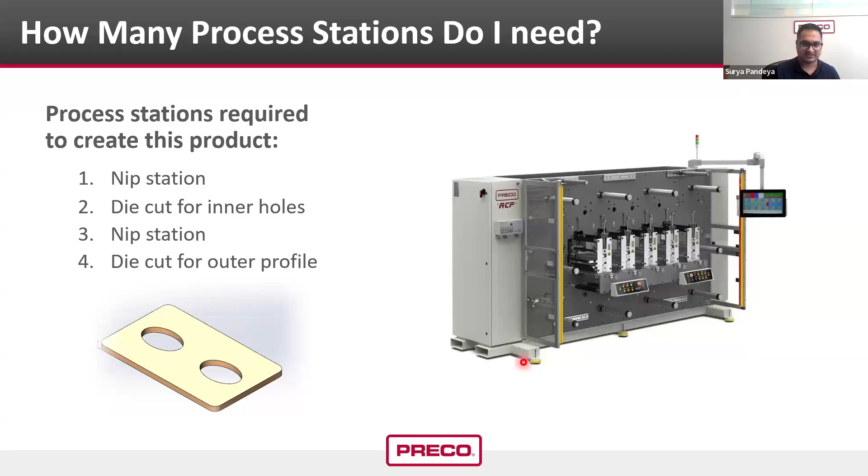So we'll be going through what kind of stations do we need, and all of the other factors that will play into it. So let's start with some examples.

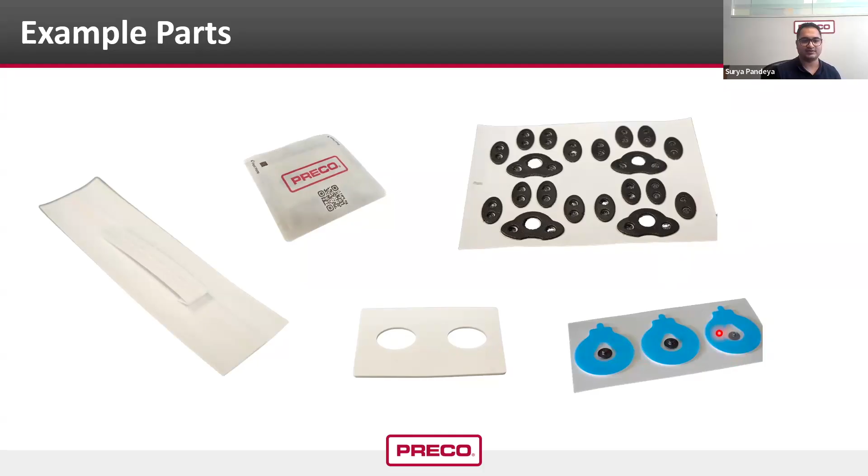And this part is like, because it is a high bond adhesive, like a VHB sample, you might need a laser cut because the VHB will stick to the die. So laser cutting all of these features, and then die cutting the whole part afterwards. And this is a simple part that we talked about previously. And here is another one that requires assembly into the product, so all of these little dots that can be assembled. So these are all the things that you can do on a rotary with various kinds of applications.

So what requires a dedicated station? Here are some of the processes that require dedicated stations for them.

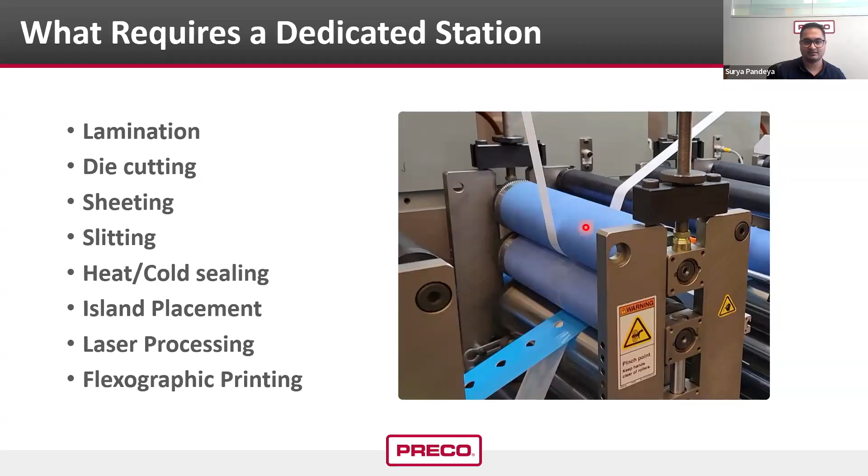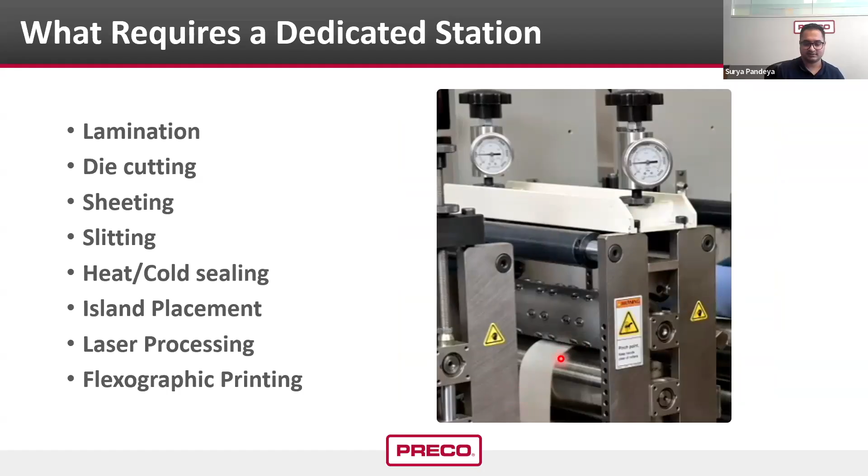The processes are like lamination. Here, the lamination is happening with all of those webs going into the nip station. And then here is another one, die cutting, where all of the features are shown right there.

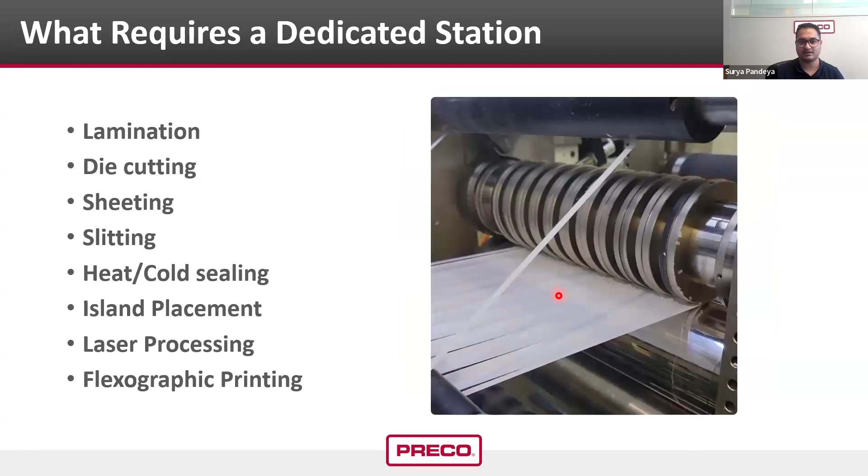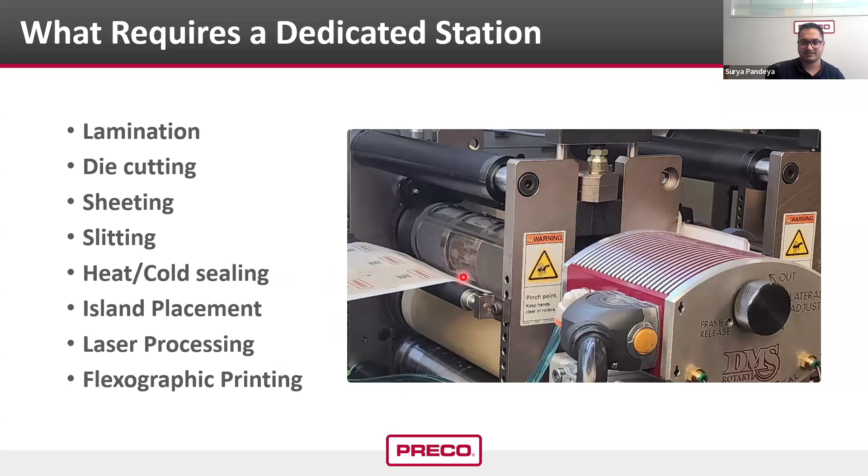Sheeting, if you need to sheet a part. Slitting, if you need to slit some lanes, like one web into multiple lanes. Heat sealing or cold sealing, if you need to heat seal some product with some part inside, then you need heat sealing or cold sealing.

Island placement - if you need some part to be assembled after cutting, and you might need them in a different repeat in a web or something like that, then you can use an island placement unit.

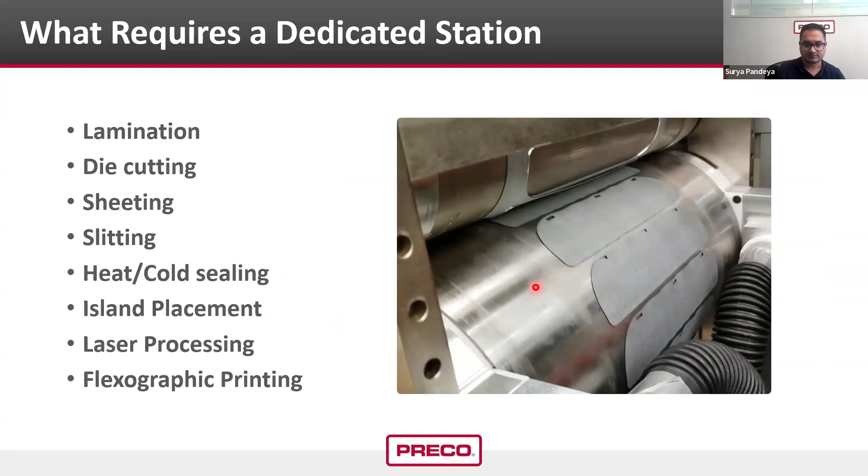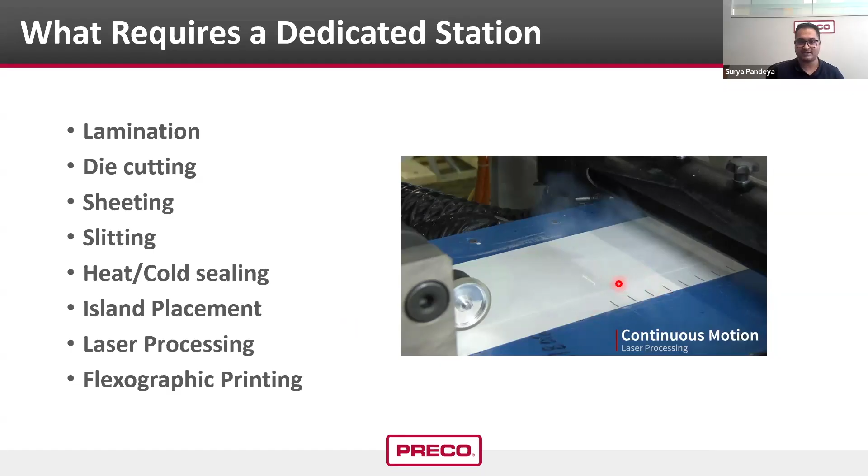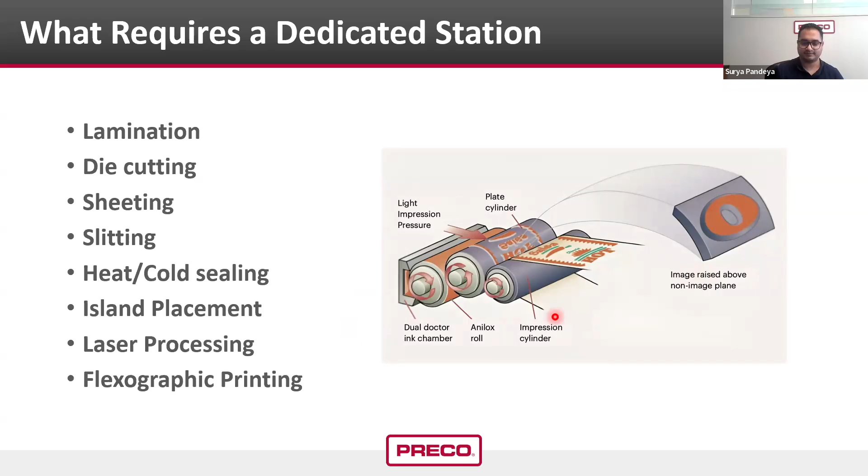Laser processing - you can also integrate laser processing in a rotary converting platform, and it will also require some dedicated station space. Flexographic printing can also be added into a rotary, and the flexographic printer will also require dedicated space for the process.

Besides this, there are other factors like materials. How do materials affect processing? Some special materials might require extra stations that will need to be implemented for the process to be better.

For example, if you have a stretchy material, then you might need a low tension spindle, a dedicated station to let out all the tension in the material, release the tension, and then get a good part.

Sometimes if you have strong adhesives, you might need to strip them using some brute force. So you might need a differential spindle, or a station that can strip the adhesive properly and then feed it to a spindle or any other waste collection unit.

The sacrificial liner or tape might need another extra nip station, so that you can laminate that sacrificial liner to your adhesive layered web. So soft materials, you might need some extra nips.

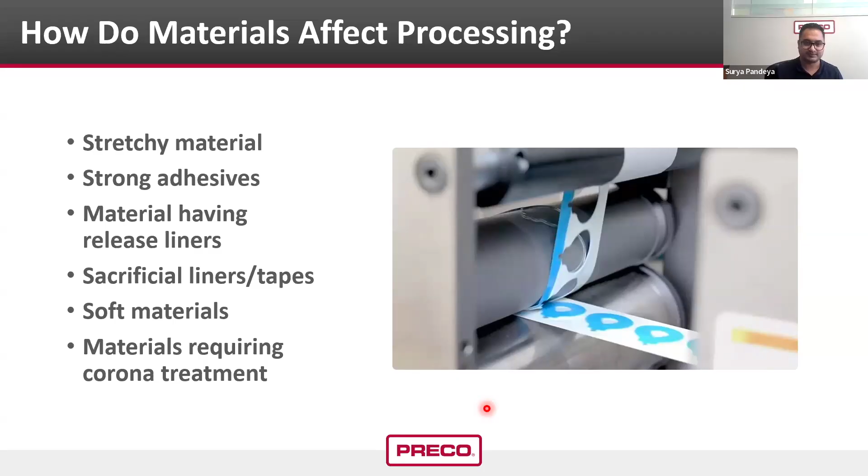The part construction - if you have a more complex part, if you have a number of materials that go into your part, then you might require more nip stations to control the progression of all of the webs.

Right now here you can see like 4 webs making a part. So you might require 4 of the different nip stations to control the progression, and sometimes you can use one station to take 2 of those webs together also.

Another thing is part geometry. If you have a lot of features on your part, then you might not be able to take out that feature in one station. You might need to add another station. So those kinds of features also you need to take into account.

And the part tolerance - if you need a very precise or very tight tolerance, then you might need to add extra nip to control the progression of the whole web, so that you can cut it properly and then register it properly to the registration mark.

Waste trim or matrix - like we talked about before, if we have more waste matrix for multiple webs, then you might need extra power nips, or sometimes roll feeds you need to add, or you might need to add extra spindles to your process.

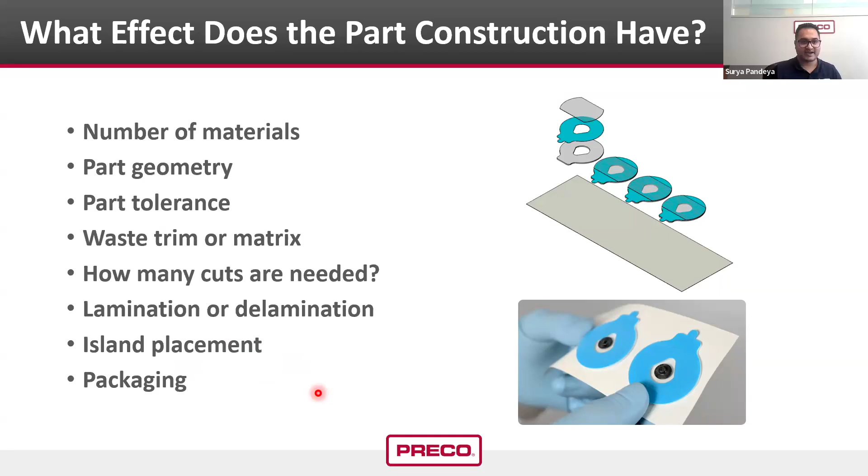So all of these factors, all of those variables we discussed previously, will dictate the size of the system you will need. And for a rule of thumb, you might wonder how do I choose what kind of things I need to consider. The rule of thumb is a simple rule that you can take to determine what kind of system you need.

So for 1 to 2 die cuts in your part, you can use a small system—a small RCP with 3 stations, 6 spindles. You can use it to get away with your product.

If you have 2 to 3 die cuts, or you want to do limited packaging, heat sealing, or cold sealing, then there's some medium unit that you can use. And all of those extra stations might help you out.

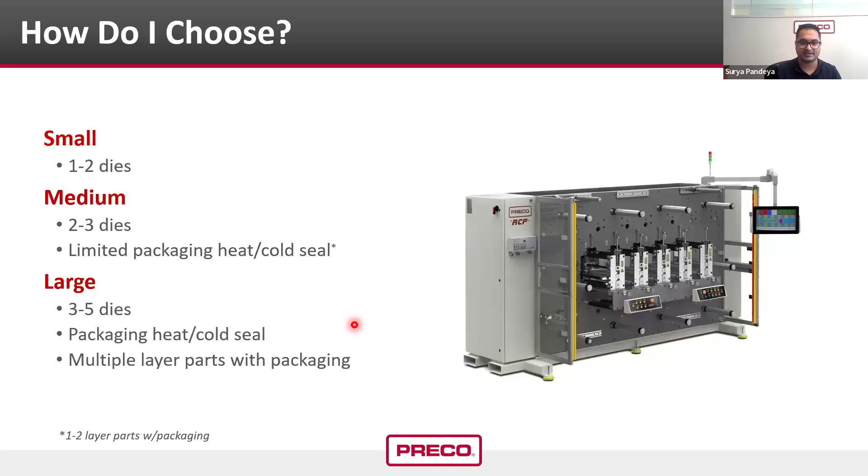And if you have 3 to 5 die cuts and want to do limited packaging, heat sealing, or cold sealing, then you might need a large system. So these are the standard systems you can use while choosing what kind of part you need to make. And it's not limited here.

There are other things like custom systems you can make, like huge systems. If you have a lot of features, you might only want one station that only cuts, without needing any registration or something like that. So there are always custom systems that you can use.

So this is how we can choose a rotary converting machine. Now Paul will be taking us through the case studies. I'll give it to Paul.

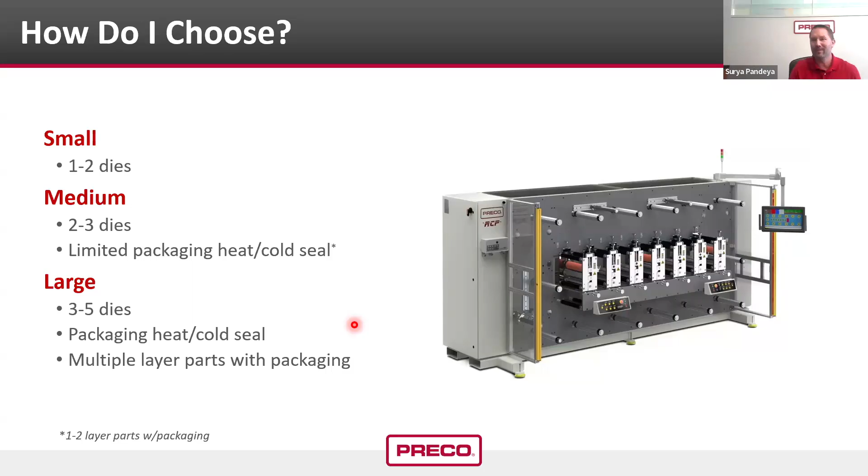Okay, thank you, Surya. Hi, I'm Paul, and I'll review these case studies with everyone. Let's say a client asks you to convert or finish label stock for them. That's usually a very simple rotary process and a good one to understand the dynamics.

So to choose the correct system, you need to gauge the inputs, outputs, tooling, tolerances, and run rate. With a registered-to-print die cut, you'll normally see a controlled tolerance of 0.5 millimeter, or 20 thousandths of an inch. That should allow you to run the process between 200, 250, maybe even 300 feet per minute.

So if we look at the criteria here for this label stock, we want to make 2 million of these per week. And at that 200 to 250 feet per minute, that's probably 4 or 5 production days.

Do we have any sacrificial liners or masking? Not with label stock normally. What are the input rolls? So we talked about having a printed roll that we'd be bringing in.

So there's just a single input roll, and then there are 2 output rolls. We have the finished labels on the liner, and we also would have the scrap matrix to take up. So that's 1 die cut. And the type of material we're looking at is paper adhesive with a silicone-coated liner, something like that along those lines.

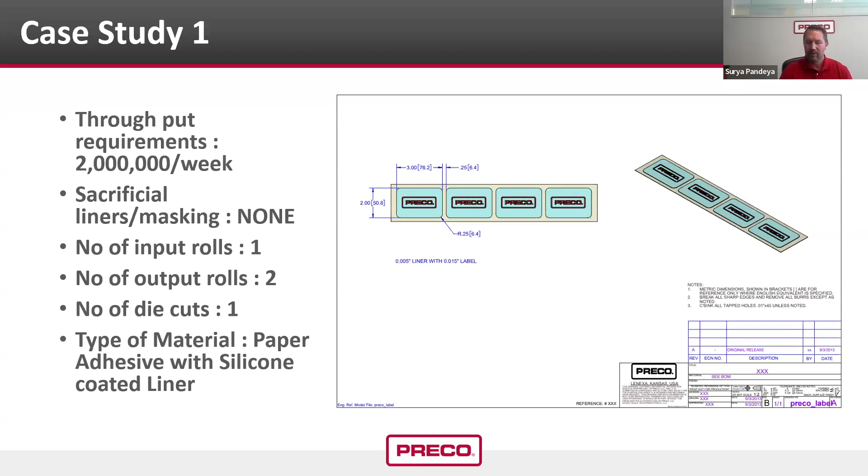So as we dive into the part construction of a label, we see the printed logo here on top with a registration mark for controlling the pitch. And then on bottom, we have the finished label where the waste matrix has been stripped around the part from either edge and between the labels. This allows the label to be dispensed appropriately for application.

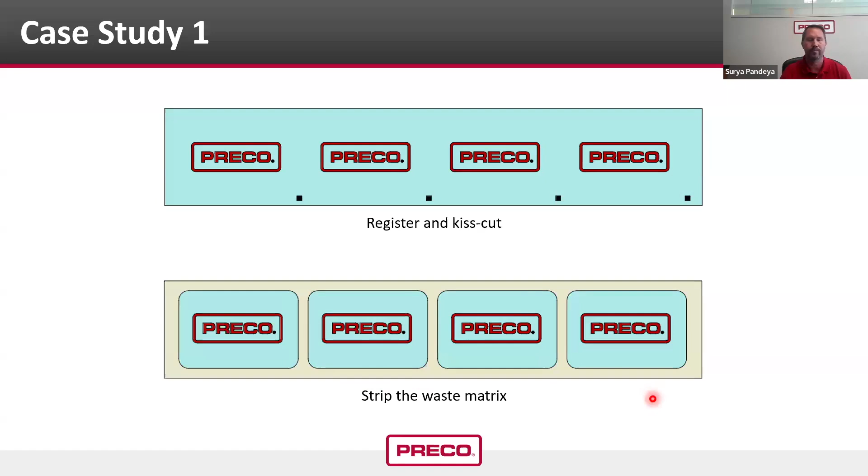So when we choose the rotary system for this part, we need a small rotary with 3 die stations, 6 spindles. So we have the input roll of label stock there on spindle number 4, which would enter the first die station, which would be a nip roller to control our tension and our progression of the material through the process. Then the web would pass underneath a sensor to read that registration mark.

There's a variety of sensors out there. Sometimes they're optical, laser, through-beam sensors—whatever fits your product.

From there, the web enters the die cutting station where we're kiss cutting the label to the release liner. The waste matrix is wrapped around the tool and taken up to spindle number 1, which is a common practice in rotary processing. From there, the material enters the final die station, which is another nip to control our tension and progression. This helps us maintain part size.

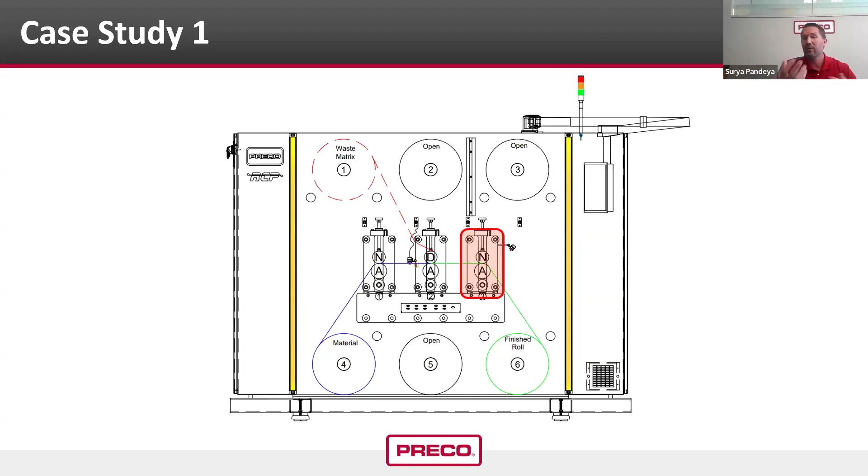As the tool's cutting the web, we have very finite control of web tension, inbound and outbound. From there, the web is rewound onto spindle number 6, and you have your finished roll of labels. You can see even with this process, we don't utilize all of the spindles—one of the nice features is there's just an abundance of spindles for the machine.

So for the next case study, we'll look at a medical patch, which is a little more complicated. I'd expect a little bigger control tolerance for this part, maybe in the 1 millimeter plus or minus range. And then our processing speed would probably be more in the realm of 25 to 50 feet per minute.

So we need to evaluate the number of layers going into the part construction, the scrap rolls that we'll create, the number of tools required for the process and the cutting, and then the finished rolls as our outputs.

So as we answer these questions, it helps direct us towards the appropriate size rotary system. For the volume on this one, we need to produce 70,000 medical patches, and that should be easily accomplished in that process speed. Do we have sacrificial liners or masking?

There's 2 die cuts that go into producing this medical patch. Our input materials are the silicone PSA, the double-sided acrylic foam, and then silicone-coated release liners.

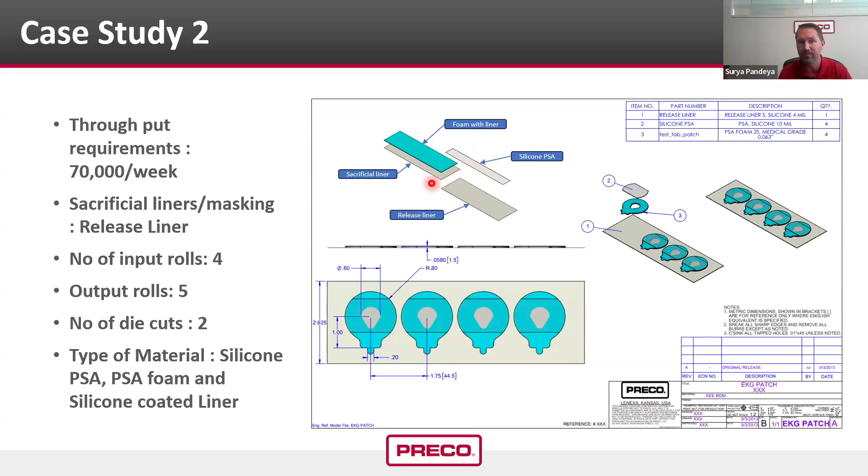So as we look at those webs as they enter the machine, the rotary processing, the first portion is the through cutting of the holes, along with kiss cutting scoring the foam up to the top release liner. This is to create our easy peel tab on the part.

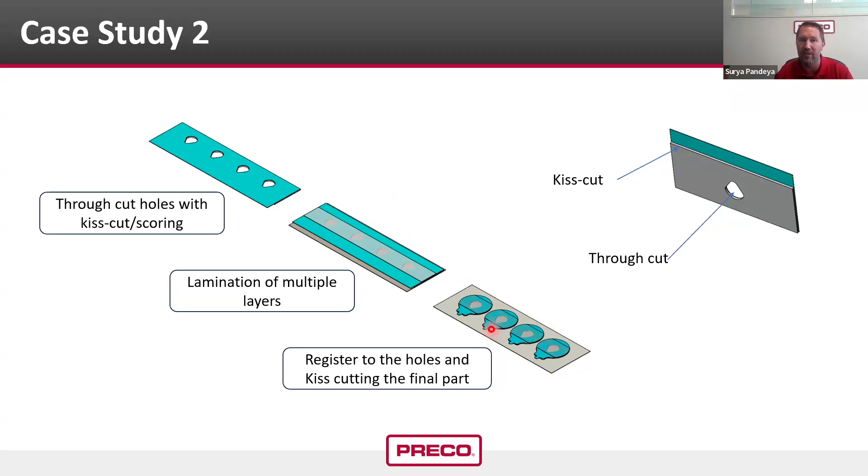The second stage is to laminate the multiple layers together, creating that construction. And then the final stage will be to register and cut the patch geometry to the release liner for the final part.

So on this process flow diagram we have here, we chose a medium RCP. We have the foam in the upper left corner on spindle 1 being unwound, and then our sacrificial release liner being applied to it. At station number 1 is our lamination point.

We have a nip applying the pressure and creating the laminated structure. Then as it progresses, we enter die station number 2, where we have our tool cutting up from the bottom so that we can score the material and remove the foam and the release liner from the edge.

And then we have an ID cut, which is being vacuum extracted from the process. Down below, you see the 2 waste liners, and that's so that we can wind both of those waste matrices with the proper tension. So we've separated them and utilized 2 spindles for that process.

In the third station, we're bringing in the silicone PSA. It has a release liner that needs to be removed from one side to expose the adhesive, and so you see a double nip stack. The material wraps around and is laminated to our construction.

We also have our new release liner brought in from spindle 9 into that same station. So we're laminating the three layer construction.

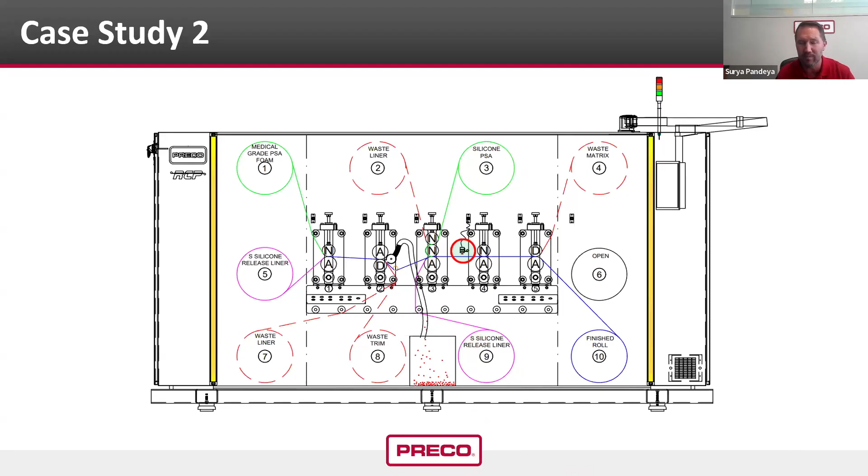As the material progresses, we have a registration sensor to read that ID cut. Then in the next station is another nip station to facilitate control of the tension and material progression once again. Finally, we have a tool to kiss cut the patch down to the release liner.

We strip away the waste matrix up to spindle number 4, and we take the finished roll down to spindle number 10. And due to the thickness of this product, we did not use a 3-inch ID core.

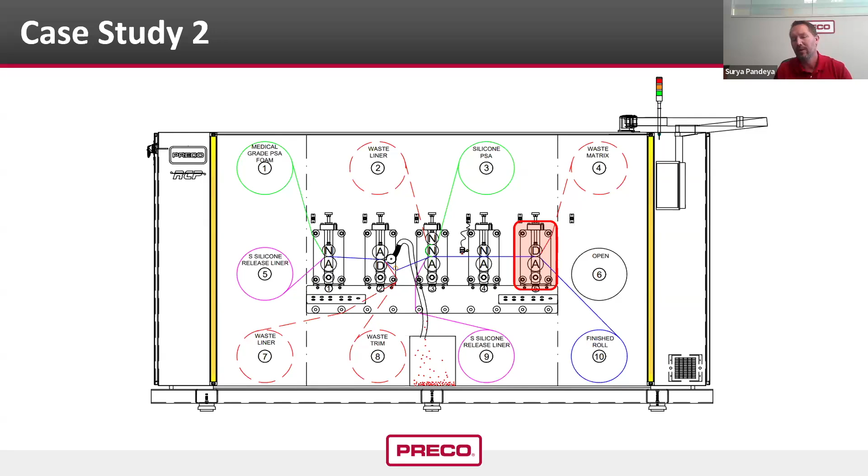We expanded it to a 6-inch core so that when we begin a roll of product, we don't have displacement of our parts on the liner. So they stay in position, and that's a benefit of just knowing your materials and your process.

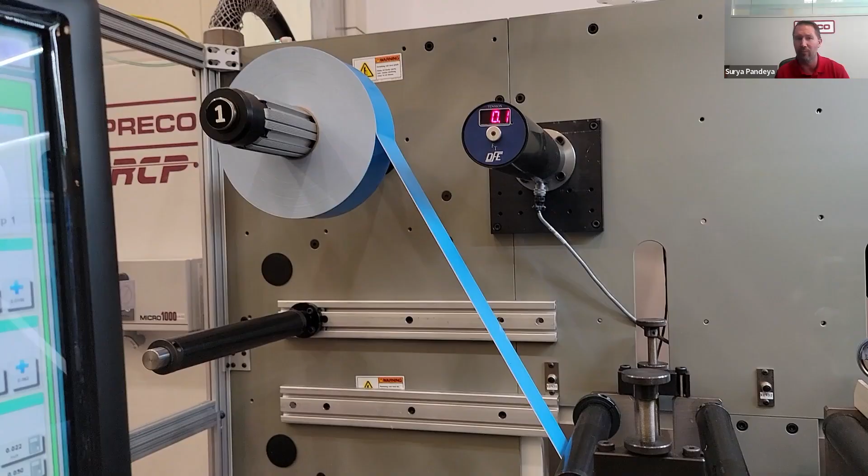From here, watch a short video of that process. We have our foam being unwound, laminated to the release liner in the first station. Here's our tool with slug ejection and the matrix, the release liner is being stripped away.

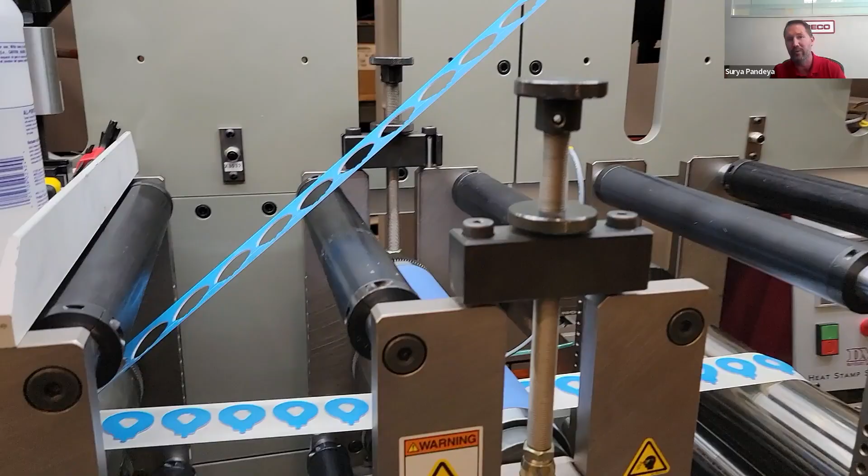The silicone PSA is being brought in, release liner removed, laminated to that construction, a sensor to read that position of the ID cut, another nip station, and then finally the pattern cut to the release liner, waste matrix removed, and your parts are completed and wound onto the final spindle.

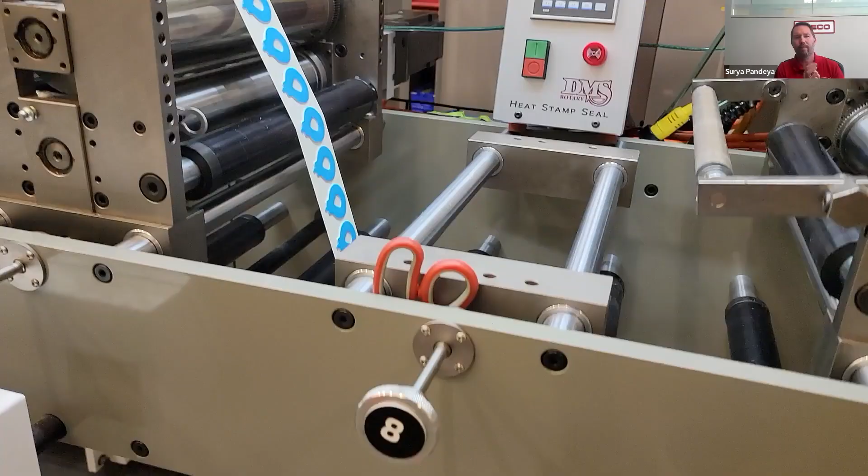There they are on a 6-inch core.

That completes the case studies. In this webinar, we learned about various types of stations in an RCP and why we need those, what kind of material or product features dictate requiring these stations, and how big of a station we need for our process. We concluded with some real world examples.